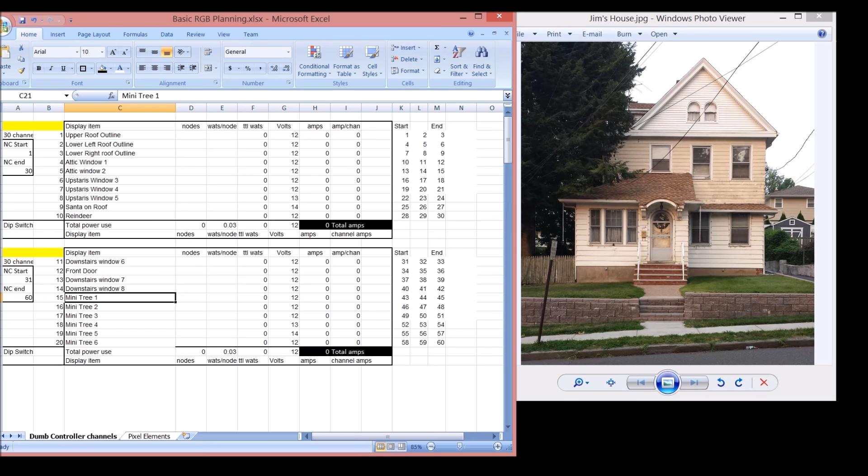And then what do I want to do with the grounds here? Well, I was thinking, if we only had 2 controllers, what if we just had a set of 6 mini trees, 3 on the left and 3 on the right? That would balance it out pretty well and make everything look kind of natural and formed. So that's the basics, and this is all we're going to do. We're just going to go in here and make some basic display items, display props, and set them up in XLights Nutcracker from start to finish.

At this point, all we're going to do is we're going to go into a show directory. Now, I created a brand new show directory just for this. It's in my Dropbox under my backup sequencing. It's just an example. So I just created a brand new file folder, and that's all I have there.

Now, the next step is setting up an E131 or a USB dongle in order to output my DMX from XLights into the DMX controllers. Now, I'll link in the video here to the difference between dumb RGB and pixels video. That video shows the interface that's necessary to connect from XLights into either the dumb RGB controllers using the USB interface or an E131 device.

So we're going to set this up using an E131 device. And to do that, we're going to just leave this set as multicast, and then we're going to leave our start universe as 1, and we're going to leave number of universes as 1.

We'll leave the last channel alone. We'll leave it at 512 and click OK. Now what we've done is we've told xLights that we have one universe. There's 512 channels to play with, and it is in fact enabled. We're able to just go ahead and start mapping different things to this channel set listed right here, which is channel 1 through channel 512.

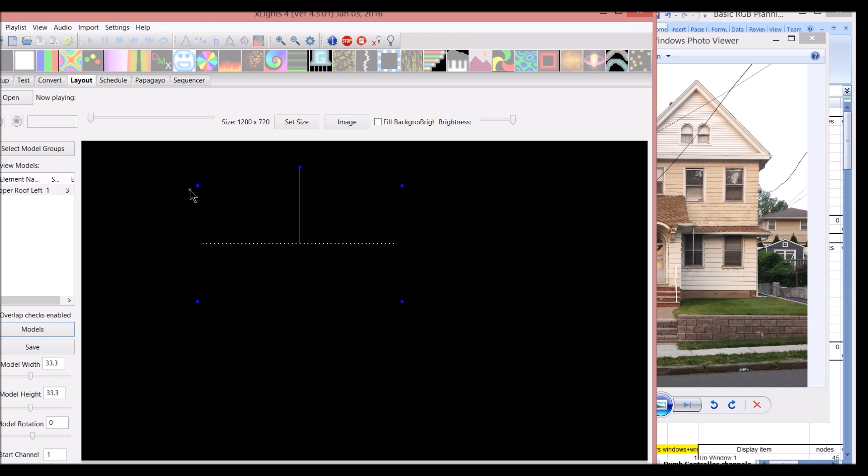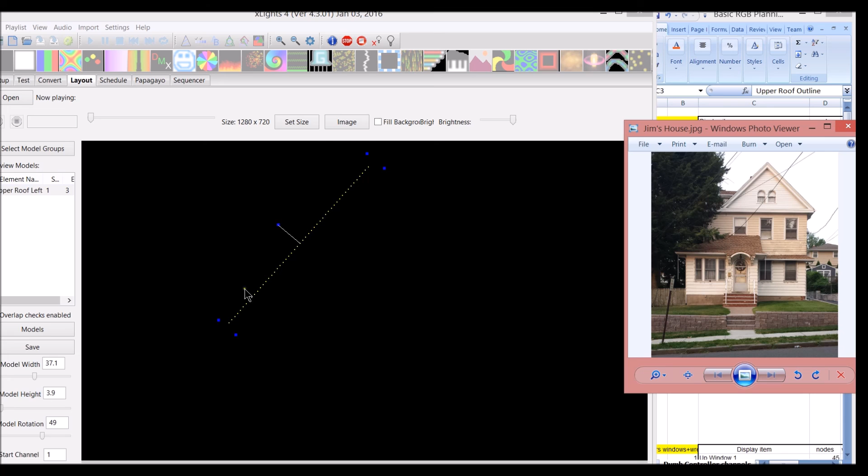Now you can notice that there's a couple different options here. What you can do here is you can actually turn and spin this. And now if I have this open over here, let's go ahead and make this a little smaller so we can reference it a little easier and move it over. We can see that our peak goes from down here to up in the center. And let's not take up the whole screen with this, so let's just make it smaller. And now we can click on it and move it. So here's the top part of my house.

Now, because xLights is awesome, and we're going to continue with one string up and down, we're going to copy this exact model, and we're going to change the name of it from left to right.

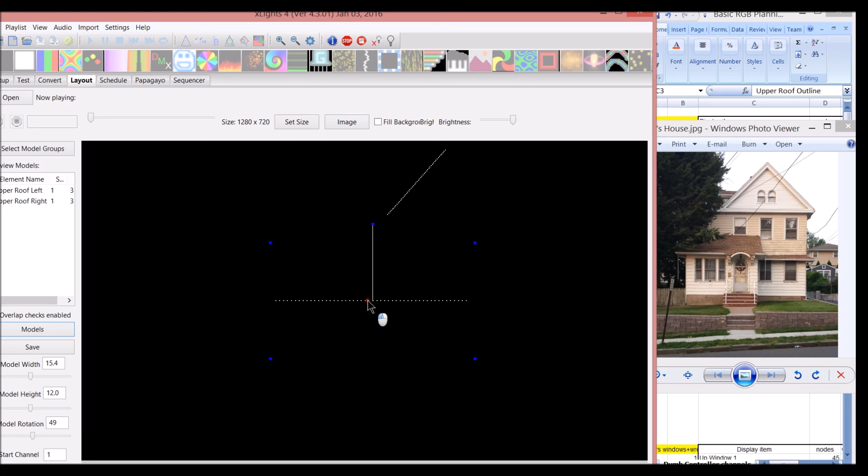And we'll leave all the same data the same. We'll just click OK. And click OK again, and when we do that, we get another model. Now, notice if I open this up, for those of you who know, over here you have a start channel listed and an end channel. Notice that the two models I created, they have the exact same channel number.

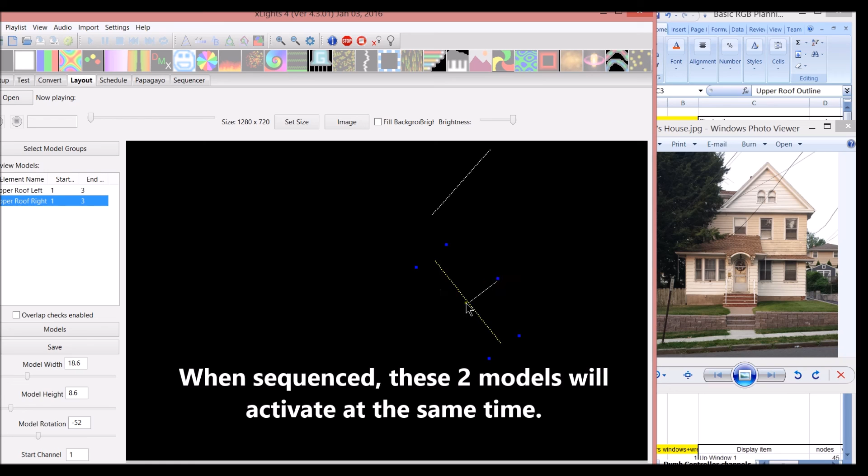So I'm going to again modify these, and then I'm going to take this little thing here, click on this, and I'm going to spin it this way. And let's try and make it a little bit more congruent with the other one. And I think that looks pretty good. So then we've got some windows here. We've got a smaller window, and then we've got two larger windows.

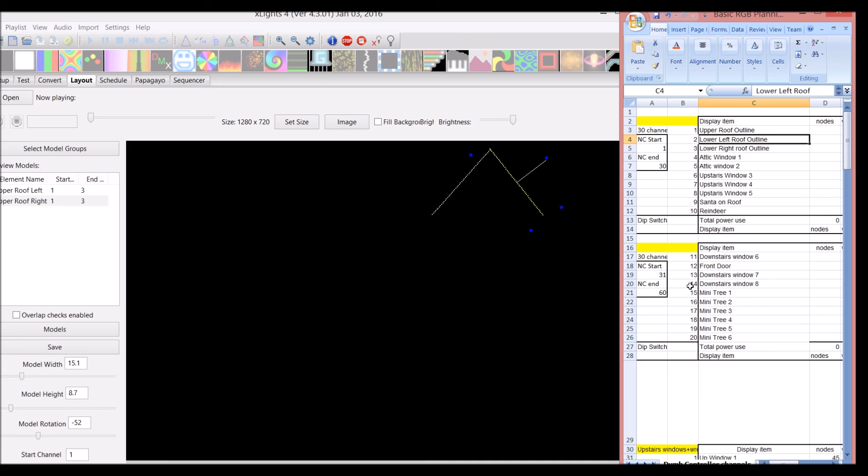Let's go and look at our plan here. We have the upper roof outline. We have the lower roof outline on the left. Okay, so we're not doing the windows first. We're going to do this roof outline here. So to do this roof outline, we're going to estimate that, let's see, here's the center of the roof, and we can come over just a little bit, and we've got this left edge line here. So why don't we go ahead and make that?

Let's go to Models, create a new model, and we'll call this 1 because there's going to be multiples. Now we're using a single strand here, and we're going to change it to 3-channel RGB. Now we know, just looking at this other model, the upper roof, we already used channel 1 through 3. We're going to start at channel 4. And the reason we know this is because if we look at our Excel setup, the lower left roof outline is going to start at channel 4, run through 4, 5, and 6.

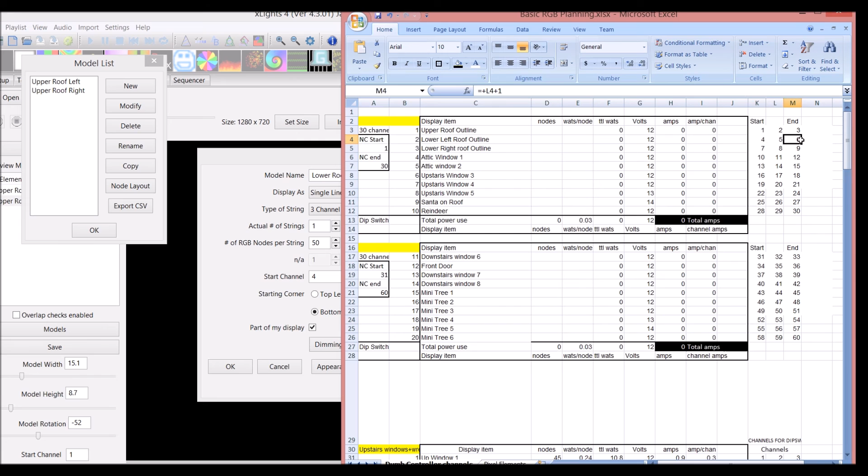So once this is done, click OK. And click OK. And now we have, as per our photo, one line, and we're going to go ahead and create 2 more lines, this one here and this diagonal here. So we're just going to click on Models, and we're going to copy, and we're going to change the number here from left 1 to left 2 and click OK. We're going to click on this one again, this left 2 we just made. Whoops, not modify, we're going to copy. And we're going to change that number to left 3.

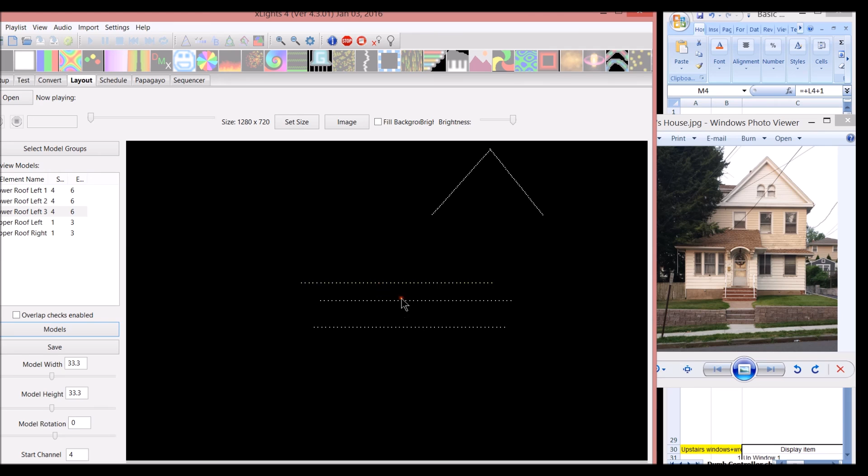Okay, so now there's 3 models here. If we click on there, 1, 2, 3. As you can see, it doesn't matter what order they're in. What matters is they have the same channel number. So when we turn on a channel in xLights, what will happen is that channel will pop on all 3 of these individual strings.

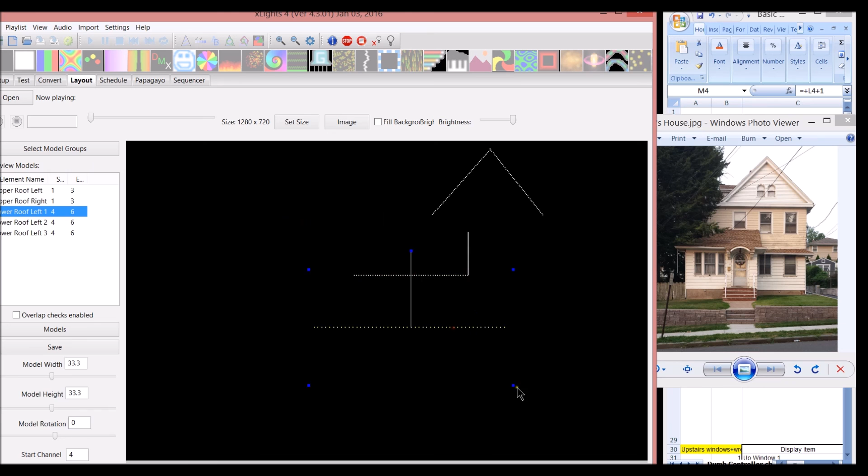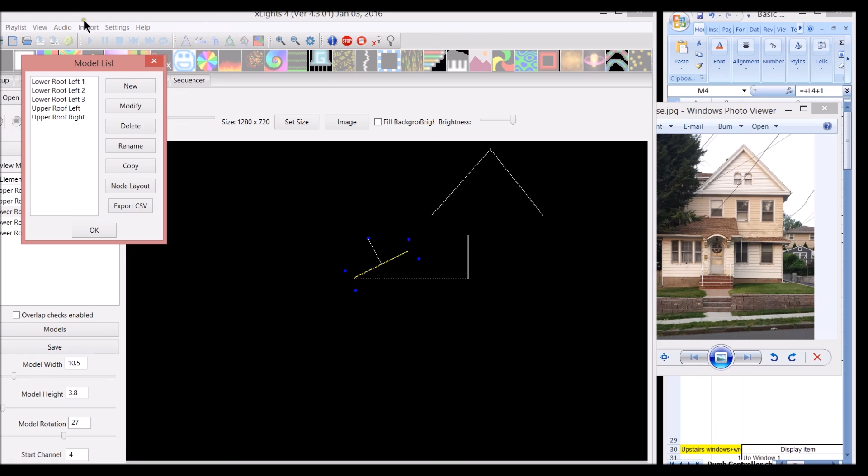Okay, so now we're going to move on to the right side, which, as you can guess, is going to be just as simple. We're going to start maybe a little bit up over here and go left and up a little bit, and that will signify our roof. So we'll go to Models, we'll create a new model. We'll call this Lower Right Roof 1. Change this to single line, RGB 3-channel, and click OK.

Oh no, we've got to change our channel. So what's our start channel? So we come over here and we reference our start channel, and it is 7. So we'll come in here, start channel is 7. Now we'll click OK and click OK again. We have a new string there.

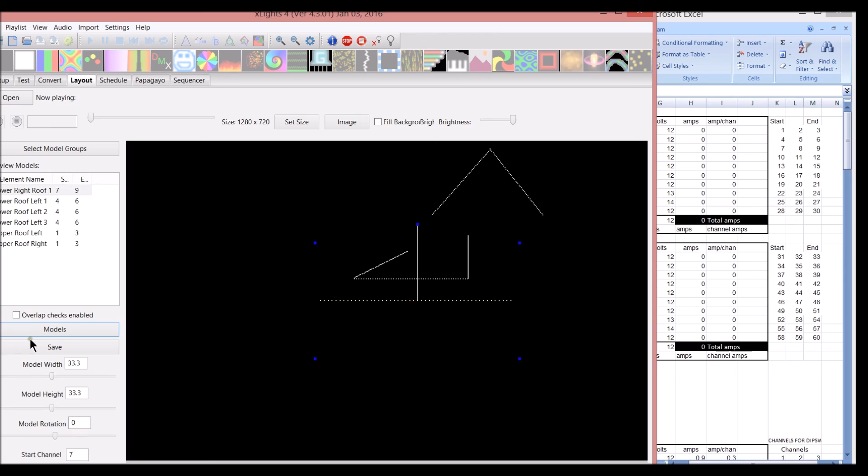Let's go ahead and copy that string, whoops, how about we select it first? Lower roof right 1, copy. And we'll change that to lower roof 2. So now we have 2 identical copies. We'll do the same thing here. Okay, so here we go. We've got pretty much a basic likeness of my roof outline here.

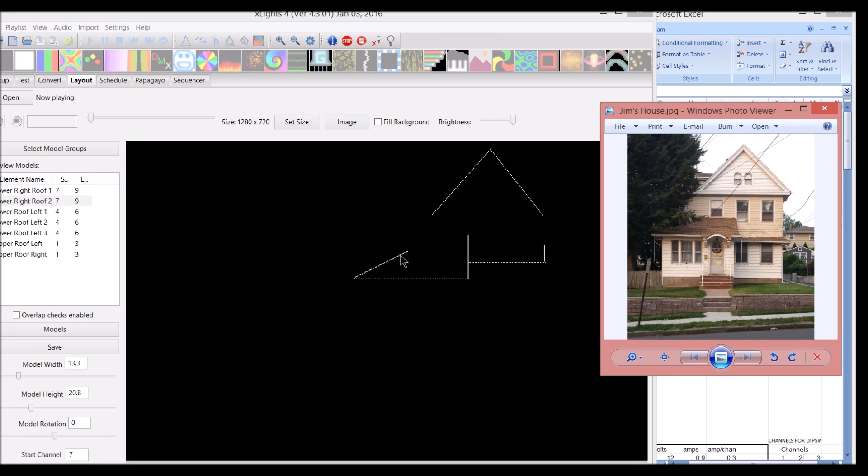Next, looking at our Excel spreadsheet, we have our first 3 channels done. Next is our attic window 1 and attic window 2. So let's go into Models. Now, here's another thing to do. Once you get on a roll and you know what your last channel is, especially for dumb RGB, this is really helpful. Just look at the end channel here, number 9. You don't have to keep referring back to your main page like I've done to see that I have to start at 10. You'll just know you start at 10 because that was where you left off. So we'll go into Models and create a new model, and we're going to call this Window 1.

We'll call this a window frame. So nothing challenging there. Change this to 3 channels, and we'll leave it. We're going to have to do some work with the window frame. It says number of RGBs on the top. We'll call this 10, and we'll call each side 15, and we'll call on the bottom 10.

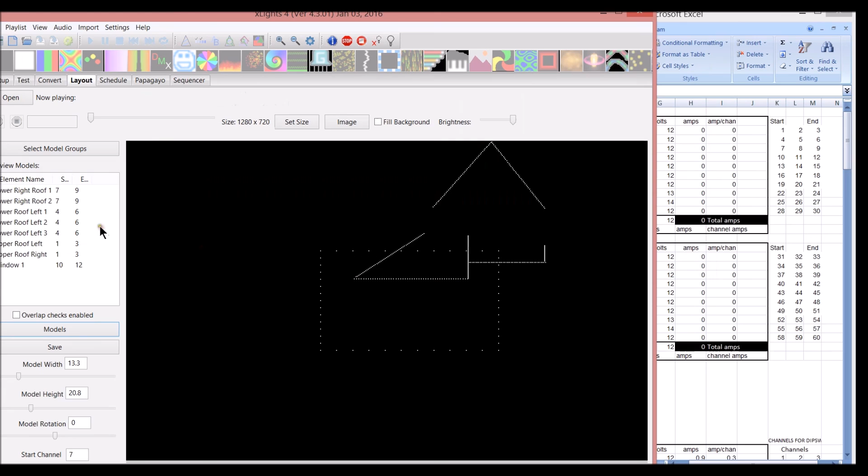So we have a start channel. What did we say our start channel was? Number 10. And we'll leave this as part of my display. We'll click OK. And now we have a window. So now we'll go to models and we'll go to window 1 and we'll copy this model. Now, because I know that we used number 10 through 12, I'm going to change this to 13 and I'm going to change this to window 2.

I'm going to leave everything else identical to this, and then I'm going to go to that one that I just created and copy it again. I'm going to copy this and make it 3, and leave all this alone. The only difference is I'm going to change the start number to 16. Now what I just did there, so you're not confused, is I just created 2 window frames. If I click on number 2, there's number 2.

Actually, I kind of made a boo-boo. I wanted to do the attic windows first. So let's go back and fix that. And now, since this is window, let's go back to our Excel sheet here. Attic window 1 and 2, upstairs window 3, 4, and 5. Let's go ahead and make those now. So that's just a matter of taking this one, window 3, and copying it. We'll make it window 4. We'll change the end channel number to the next beginning, which is 19.

And we'll click OK. And we'll copy window number 4 and make it window number 5. And the new end channel is 21. We'll change this to 22. And we'll click OK. We've got our new models in there now. And that should look good. So next we've got our whole upstairs roof almost done. The only thing we have left is Santa Claus on the roof. Well, how do you do Santa Claus on the roof?

Let's go to models. One of my favorite models is a custom model. Now I know everybody's going to say, well, how do you represent Santa Claus on the roof? Let's just change this to custom, and let's make the model width, let's say 8, and we'll say the height is 10. Well, let's make it 12. Whoops, didn't mean to hit enter there. And now we need to know our start channel. If we look down here in the preview window, we have this 24. I know that my next one is going to be 25.

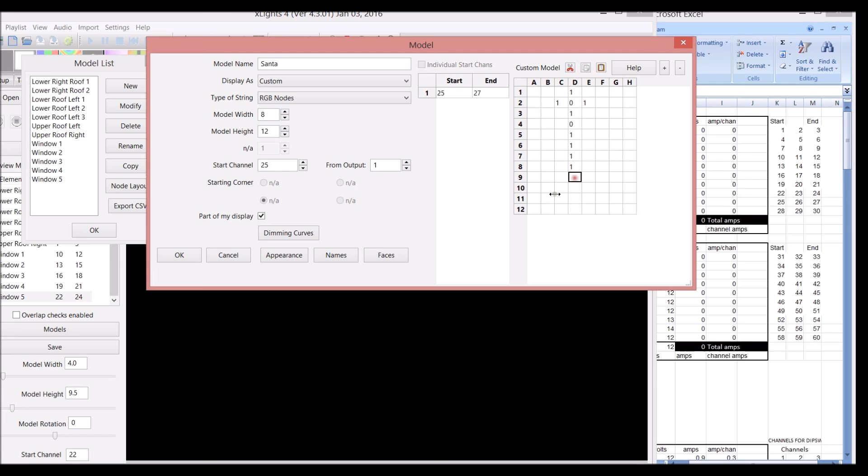But when we create a custom model, in order to tell XLights that we need a 1-channel prop in here, we need to enter a number. See how it says start channel is 25, end channel 24. As soon as we put a number in here, this should fix our little boo-boo. So I'm going to put the number 1 in here and see how that changed, 25 to 27. I'm going to make a little stick figure that will represent our Santa Claus. And let's throw Santa Claus on the roof, and we've done it.

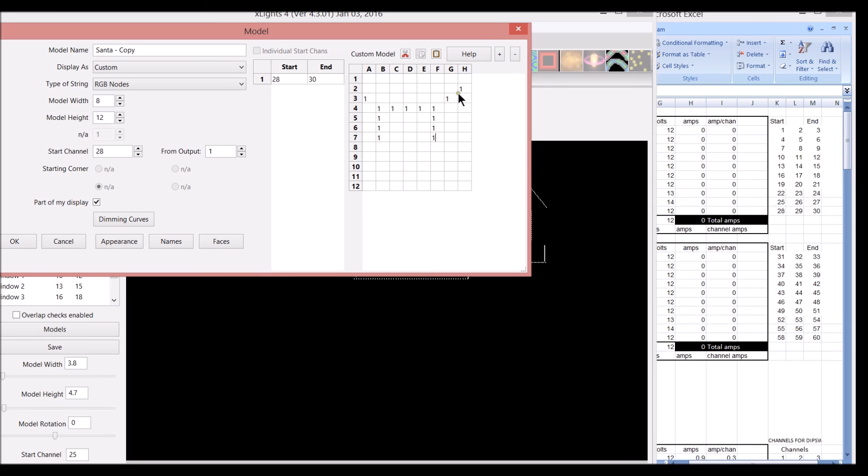So it's pretty easy to go into XLights and create these models. So here we've got Santa. I'm going to copy Santa because I'm going to make the reindeer the exact same way. And there's our little reindeer. So it's very simple to create basic shapes, and you always use the number 1 there whenever you're creating the model.

That signifies in the model that when you're creating these, and oh, I didn't change the name. I just left them as a copy. Here's an example of a boo-boo, and I need to go in and rename the model. We'll call this reindeer and click OK. So now we've got our 2 models on the roof here, and half of our display is complete.

So the next step is to fill in the rest of our models or props into XLights for the downstairs display. We're going to start with channel 31 here. We're going to do the downstairs window. Let's bring up the picture.

And we're going to make 3 windows, all using the same start channel, which is 31. We'll go into models and we'll create a new model. We actually don't need to create a new model. Let's go to window number 5 and we'll copy it because it's not much different.

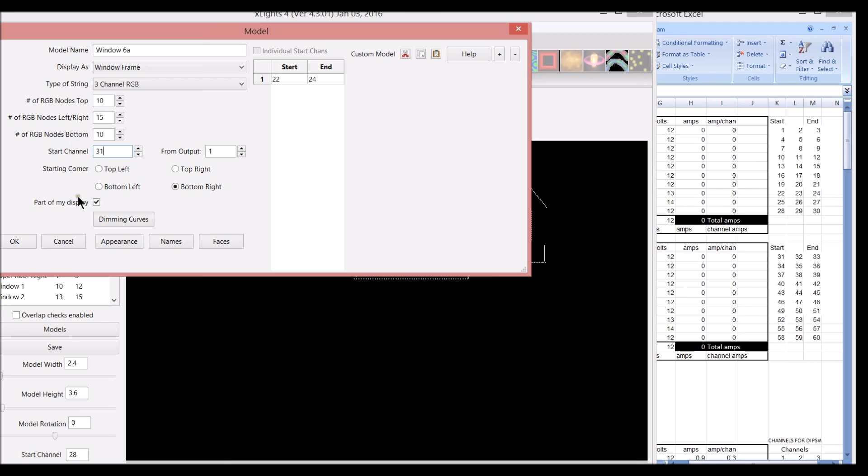Let's just go and change this to 6 because I think that's what we labeled it as, downstairs Windows 6, and we'll make 3 copies of this. Windows 6A, I'm going to call it A, and we're going to leave all this stuff alone except for this. We're going to change this to 31 because that's where it starts in our DMX channel. We're going to click OK, then we're going to copy.

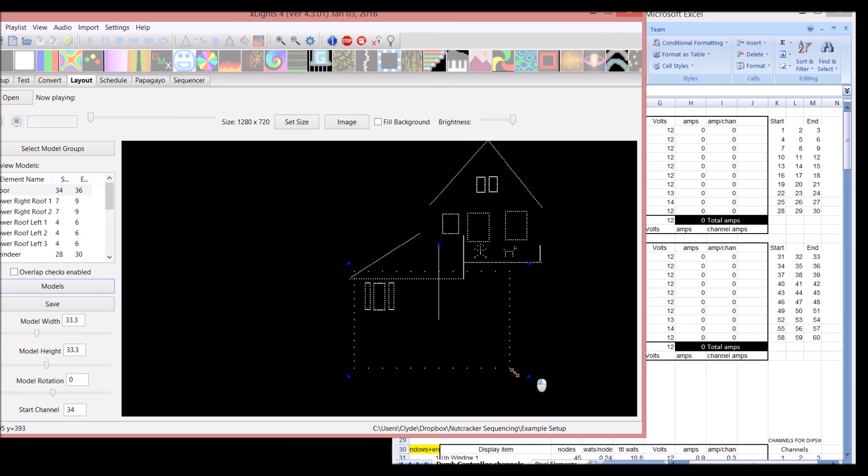We can now do our front door, which you have 2 choices here. You can make a custom model, or you can just represent the door by making another copy of a window. Okay, let's go ahead and press on. We've got our front door done. Now we need 2 more downstairs windows, and we need them to start at channel 37.

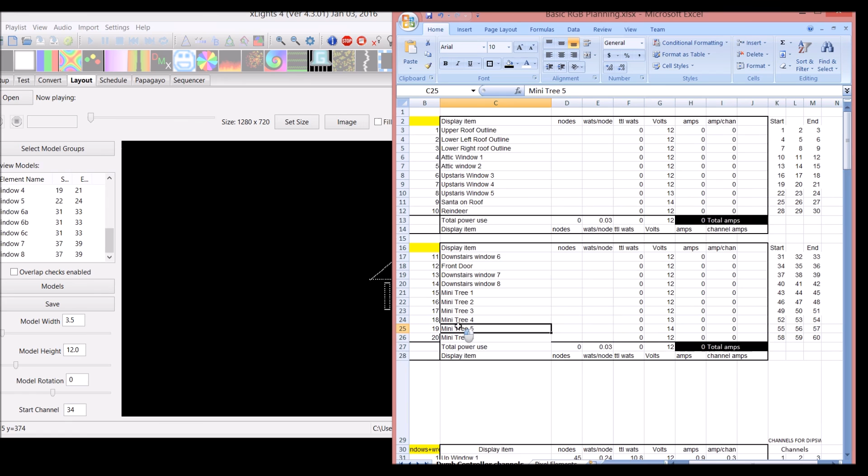Next is we need 6 mini trees. Okay, so everybody always asks me, well, how do I make a mini tree? Well, this once again is a very simple prop. We can go into models. Now you can create a new model, and what they don't have is a model that calls on an actual physical tree to come up. So like there's no triangle or anything. So what you have to do is you have to create a custom model.

So we'll go ahead and we'll do this very simply. We'll do this with, let's call it a width of 8, and let's go 10. I think that's all I'll need. Actually, it's a height, width is a 9, and we'll go with 10.

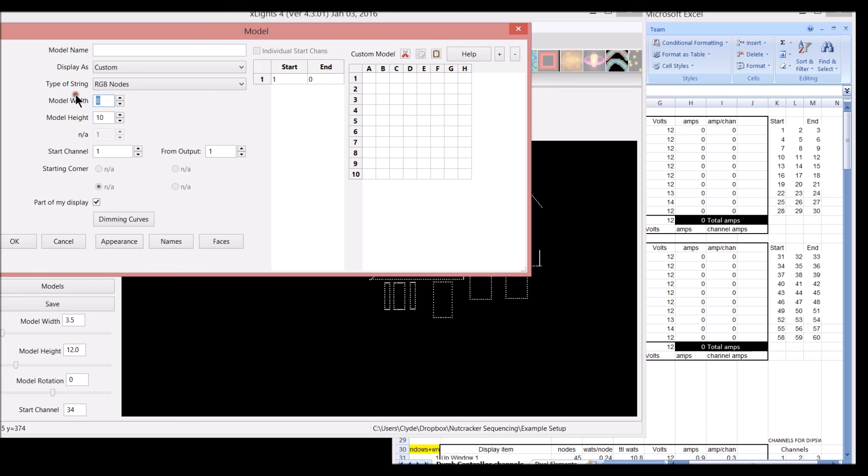And like we've done with so many other models, we're going to copy this. We're actually going to go in. I don't think I set the channel to the correct tree mini. Yeah, I didn't set the channel correctly. So let's go do that. Mini tree number 1 is start channel 43. So let's go over here and change the start channel to 43. So now that's done. Let's go ahead and copy this model 6 more times.

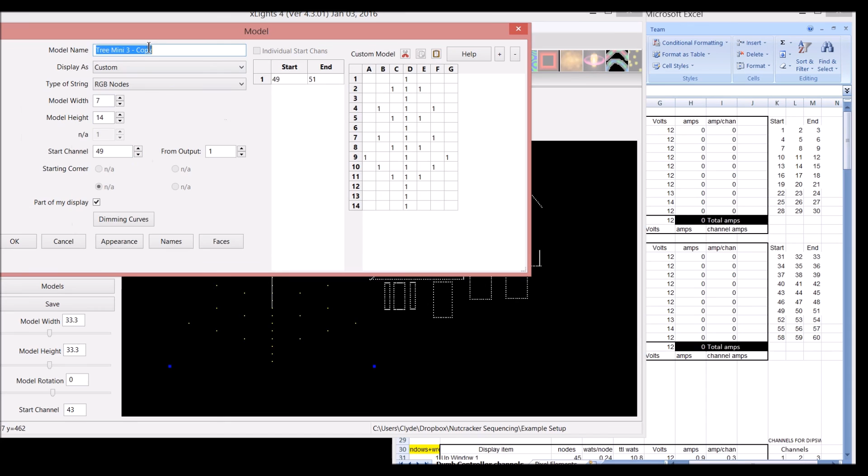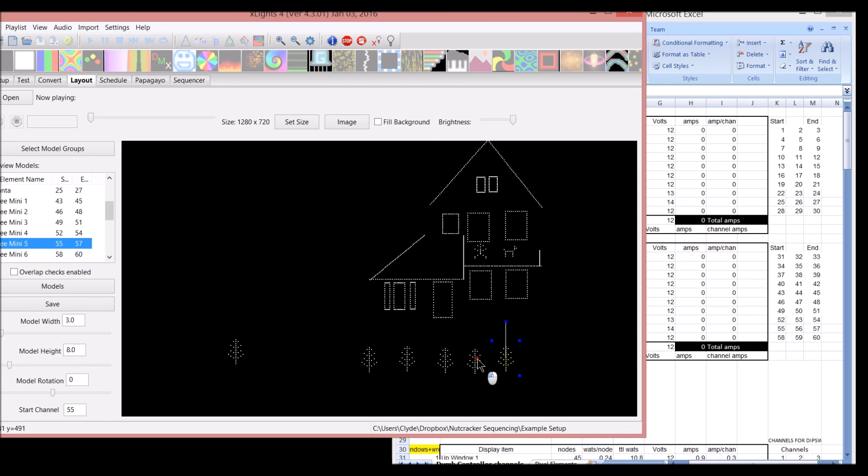Let's look at the dimensions. Dimension is 3 by 8. So you can see that we've got ourselves a nice, simple, and very easy to create xLights setup using just 20 outputs of dumb RGB.

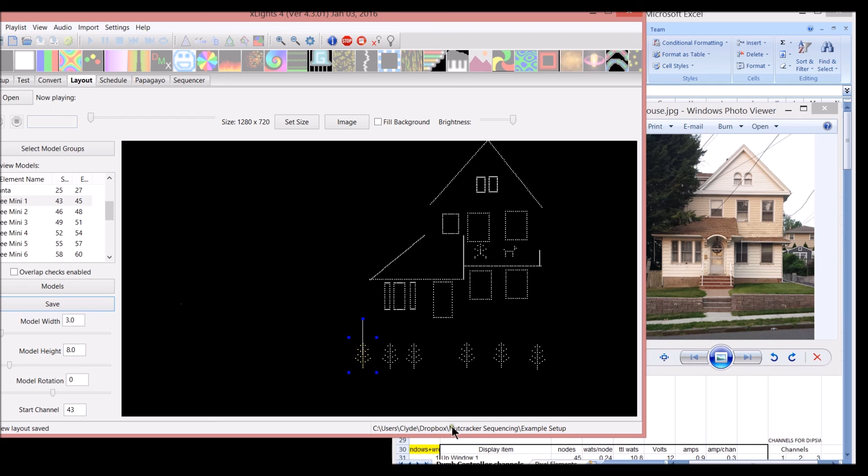And now pretty much the last thing that we have to do is we need to click save. And I should have mentioned this earlier. Make sure you click save often throughout. That way if xLights should happen to crash, or you close out accidentally, now you have this saved. Now let's go into the file directory in my Dropbox. So this is the actual directory where we're saving things.

We have a key bindings file, and then we also have an xLights RGB effects file. This RGB effects file saves every bit of the data that's listed right here on this screen. Okay? So anytime you need to save data on this screen, you have to come over here to the layout tab and save it. So if I move this and I put a tree on top of the roof here, let's say I do that, it's got to be saved, or if I close out, this will reappear where it was located before.

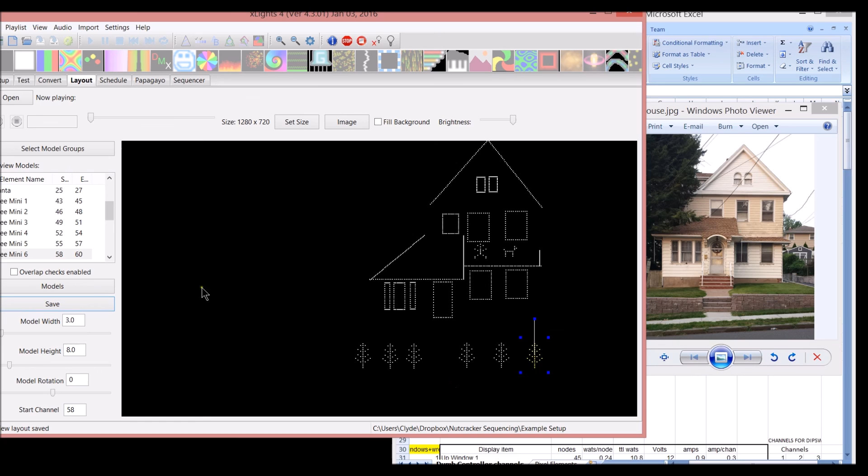Likewise, if you do a lot of prop adding, that also becomes problematic if you don't click the save button and you do happen to have to close out of it. So I hope that was helpful for you guys. Like I said, there is a way to add an image. You can always pull in an image, I suppose. But like I said, I really don't need it. It's not something that's necessary for me to make out a display, but I do need the visual reference just to help me get going.